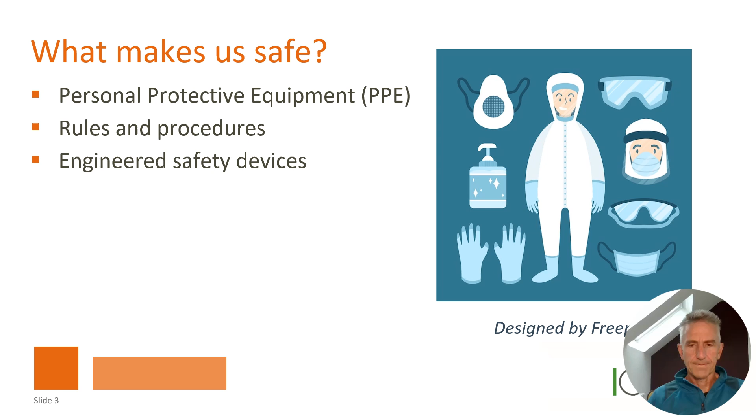These devices are an added expense to buy in the first place and require regular maintenance. Otherwise, they won't work when we need them and the equipment becomes unsafe. And with all this, it's quite easy to be reassured, but should you be? The reason we need PPE and other things that we provide for safety is because we're dealing with things that are potentially dangerous. If we lose control of the hazards, people may be harmed. But everything we do to make a system safe can fail.

There's the human element where people may fail to wear the correct PPE or not follow the rules. And manufactured items can fail. That includes the PPE and any engineered safety devices that we install. Again, there's the human element with rules and procedures which people may not always follow, but it is actually impossible to write rules and procedures that cover every possible situation.

This is where inherent safety comes along. It proposes a different approach. It encourages us to engineer systems so that add-on safety features are not required. That way people are not going to get harmed because they did not wear PPE, because they didn't follow a procedure, or if a safety device fails.

In this article that appeared in the LPB in June 2018, Graham Dalzell and Alan Chesterman question whether addition of instrumentation, which we use a lot for monitoring and controlling processes, really makes things safer. More significantly, they ask the same question about pressure relief, emergency shutdown and fire detection systems that we add specifically for safety. They acknowledge that eliminating everything is not practical, but changing our mindset so that we really think about why we need things could result in systems that are inherently safer.

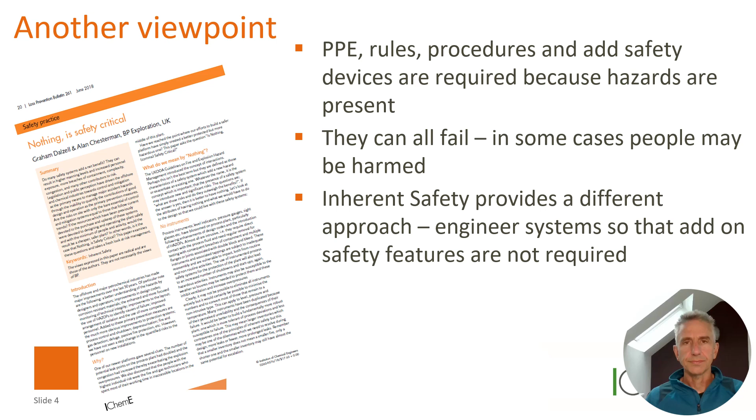The late great safety guru Trevor Kletz encouraged us to start thinking about inherent safety over 40 years ago. In this article published in LPB in June 1983, he described the basic concepts. For those not familiar with Trevor Kletz's work, he had a rare skill of being able to explain ideas in very simple and clear ways. As his ideas about inherent safety developed, he proposed the following 3 statements to explain how it could be used in practice. The first was, what you don't have can't leak.

Why do you need that hazardous substance or condition? Could you achieve the same outcomes with safer alternatives? Could you install less of it? In lots of cases, it's not possible to eliminate all the hazards, so we need to be prepared for situations where control is lost. In this case, if people are not near the hazard, they cannot be harmed. Instead of locating your office block near to a hazardous part of the process, move it to another part of the site. The last one I would say is particularly interesting.

We can see the world is getting more complex, and I guess we all have concerns. Trevor highlighted that it becomes very difficult to understand complex systems or predict how they're going to work. This means we can't see if it is safe or not. One of the biggest ironies is that the increased focus on safety in recent decades has resulted in us adding more things to keep people safe, and these have added greatly to the overall complexity of our systems.

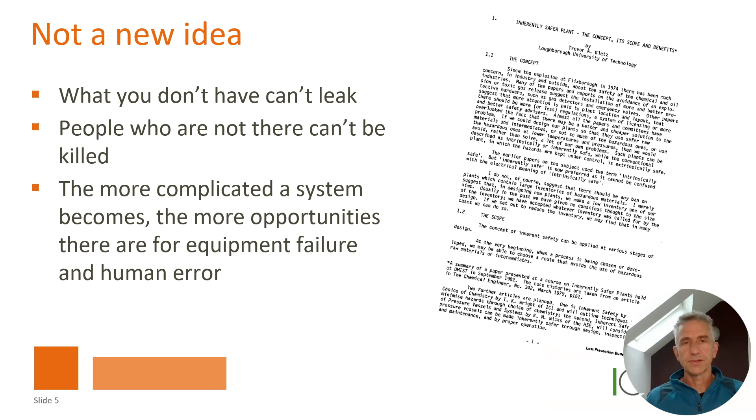Now this year, 2024, marked the 50th anniversary of the Flixborough disaster. This happened at a chemical facility in North Lincolnshire in England. Most analyses of the accident tend to focus on why the pipework joining 2 reactors failed, because this was the event that led to a large release of flammable material. The subsequent explosion killed 28 people and injured another 36.

Trevor Kletz followed another line of inquiry. He asked, why was there so much hazardous material in the first place? After all, if there'd been less, there would have been less to escape. The explosion may have been smaller or less energetic, and fewer people would have been harmed.

He concluded that the system design resulted in a very inefficient reaction. This meant a higher inventory of raw materials had to be passed through the reactors, and so those reactors and the associated pipework had to be much larger. If the reaction had been more efficient, the size of the plant could have been reduced. The amount of material to leak if the pipework or reactor failed would have been much less.

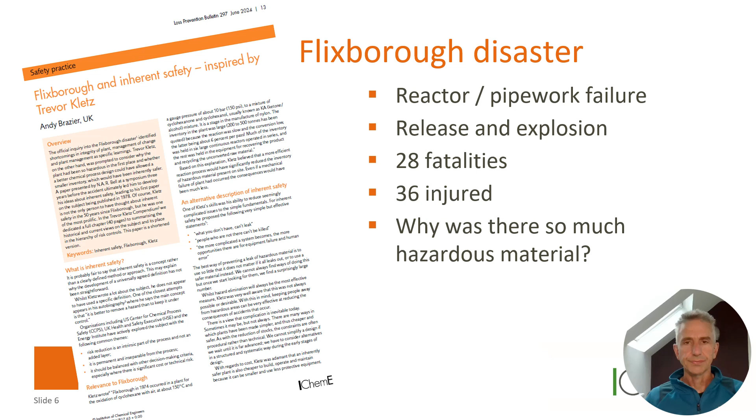Whilst our aim must always be to prevent accidents, we have to acknowledge that there are always hazards and that prevention is never 100% reliable. The sad reality is that when accidents occur, people die who did not need to be anywhere near the source of the hazard. In particular, office workers who may not even realise they were in danger.

By far the best strategy is to lay out your site so that people can work as far away as possible from the hazards. I mean, buildings can be protected against those hazards, but this is expensive and less effective control. And it can have knock-on effects. For example, you can block up the windows to protect against explosions, but this makes a big difference to the working environment inside the building.

In this paper published in LPB in June 2024, Andrea Longley and Ken Patterson describe a number of accidents where people died because they were in a building near to a hazard. Flixborough is one of those, but we also have BP Texas City, where people died inside a temporary building that was completely destroyed by an explosion. Also, we had an accident in 1992 at a site owned by Hickson and Welch. In this case, a jet fire impinged on an office block, killing 5 people inside.

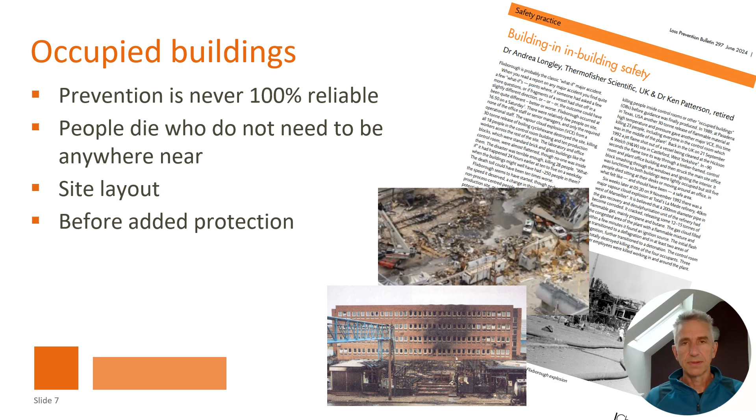This is arguably one of the most overlooked aspects of inherent safety. We are often somehow unreasonably impressed by complex items and favour them over the simpler alternatives. But simpler systems have fewer points of failure. They are easy to operate, and this means people need less training and they are less likely to make mistakes when interacting with those items. There is less to monitor, and it's easy to tell if everything is working okay or if something is going wrong. And if a fault does occur, the possibility of it cascading further to other parts of the system is much less.

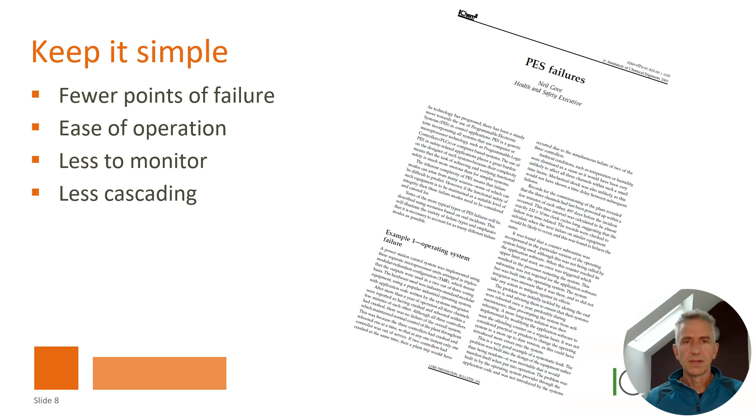In this paper from LPB 2001, Neil Gove explains how the increased use of programmable electronic systems has resulted in complex control systems being used. They can be quite cheap and easy to implement, but it becomes very difficult to fully understand how they work, and more importantly, how they can fail. This is particularly concerning when they're installed to carry out a safety function, because it's really difficult to know if they will actually work when we really need them to.

The principles of inherent safety can be applied to any industrial activity at any phase in its life cycle. But the best time to consider it is at an initial concept, when that's being developed for a plant or a site or some sort of activity. Decisions made at this early stage will influence everything that follows. Unfortunately, we often miss that opportunity to ask, is a hazard really required? Do people really need to be nearby? And could the solution be simplified?

Encouraging designers to consider the opportunities is another way of developing an inherently safer solution. Instead of them just following previous conventions, ask them to research, are there alternatives? Once plant or equipment is operational, the opportunities to fully implement inherent safety are reduced, but it doesn't mean it can't be considered. Reducing the quantity of hazardous material being stored, for example, operating at lower pressures or temperatures, and keeping people away as much as possible should always be considered.

And when it comes to planning maintenance, make sure that the equipment is properly isolated and all hazards and materials are removed. Try to plan work so that adjacent hazards are also eliminated. Keep the number of people on site to a minimum, especially during the most hazardous times. Experience shows we have a disproportionate number of accidents when restarting plant and equipment after it's been maintained.

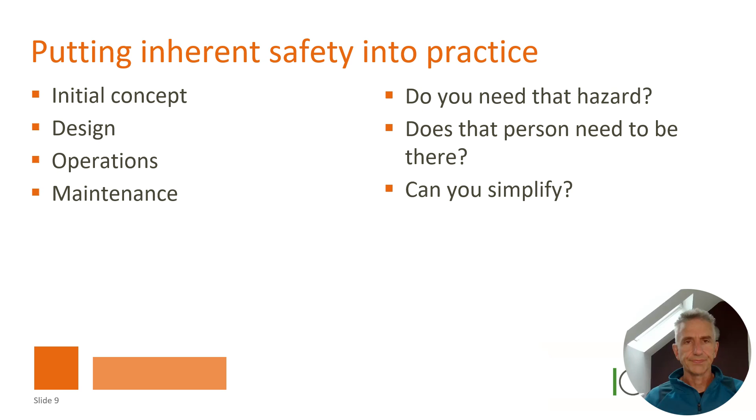I hope you found this very brief introduction to inherent safety interesting.